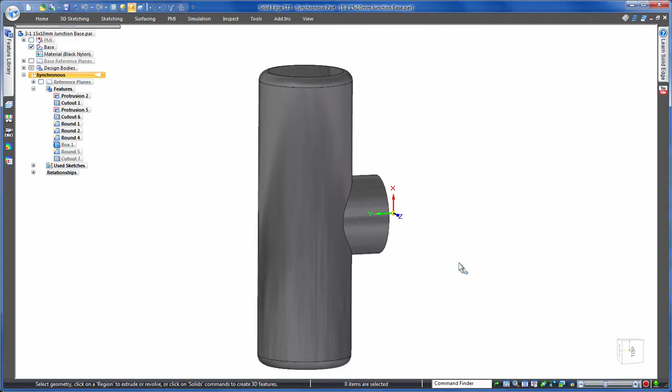Reuse and repurposing is of course the preference over recreation, whatever the subject. It saves time and effort. In CAD, this usually translates to importing data and working with the whole model. However, synchronous technology in Solid Edge also allows you to reuse individual design details.

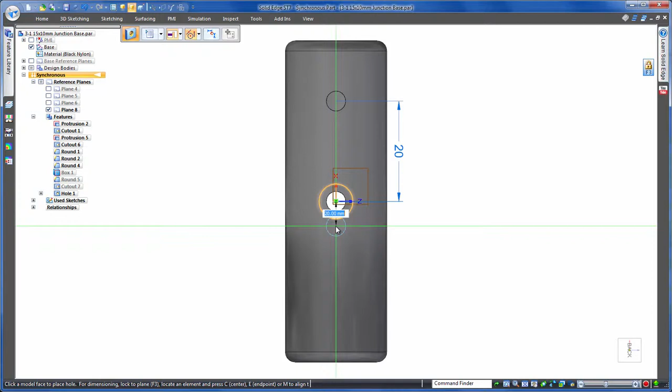In this example, we're going to create a custom fuel adapter starting with a basic body and then simply reuse design details from other Solid Edge projects to complete. First, so that we know where our output ports are going to go, we'll quickly create a few holes. And notice how quick we can space these, no separate dimensioning tool required.

Now for the barbs, and this is where we can save lots of time and effort. I know that we've created geometry like this before on another project, this blue component, so why not reuse this detail rather than waste time modelling from scratch? We simply select the detail we wish to use. The well-known Windows fence select saves a lot of time here.

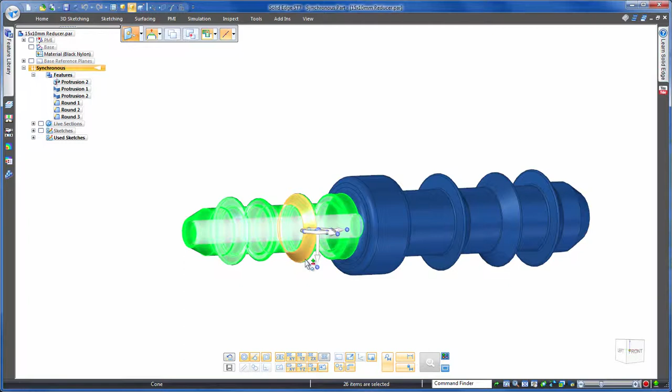Oh, and notice that we're moving what we call the steering wheel to a specific position. This is our main control for synchronous technology, and here it'll help us locate the detail in our new part. Then simply click copy, or use the Windows Ctrl+C shortcut. Back in our custom fuel adapter, we just paste it in, again using the Windows shortcut Ctrl+V if you like.

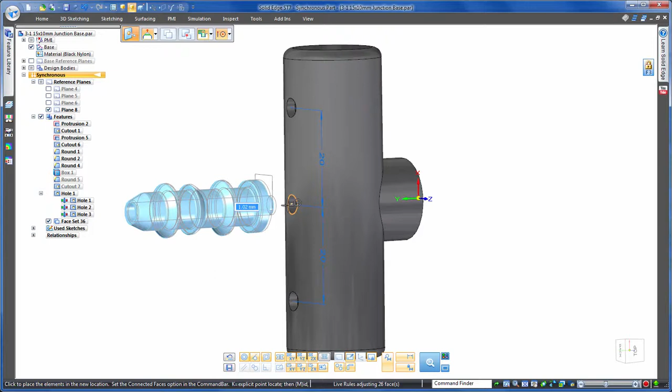And you can see our steering wheel is just where we left it, so placement becomes the simple task of snapping into place. And if you think you'll be using this detail again in the future, you can just store it away in the library. All you have to do is open your library pane and paste it into here instead. To reuse it, just drag and drop.

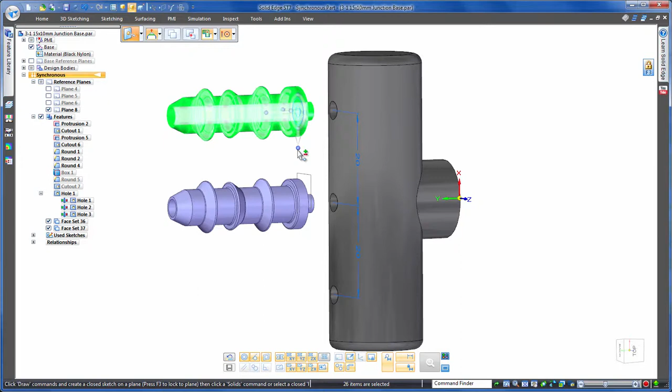The steering wheel can also be used to enter precise offset values. Here we'll offset it exactly 15mm and then snap the barb into place. Additionally, by holding down the control key while we drag the steering wheel, we can copy this barb to the other location required. Again, notice the familiar use of Windows shortcuts. Holding Control in Windows does the same thing, copies, quick and easy.

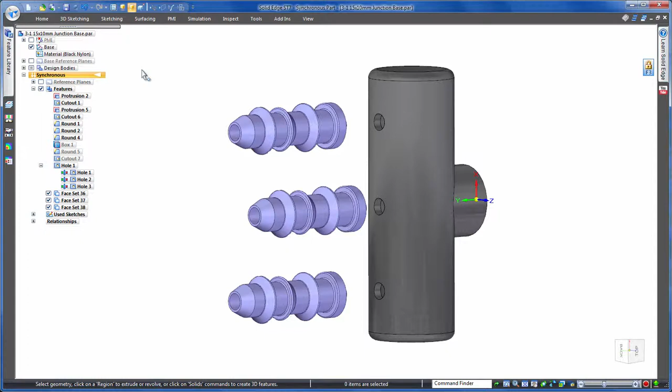Now that we have the barbs in the correct location, we need to figure out how we're going to attach the geometry to the part. Luckily there's no need to worry about such things as Boolean operations, as Solid Edge will take care of this. Watch as it automatically extends to connect to the solid geometry.

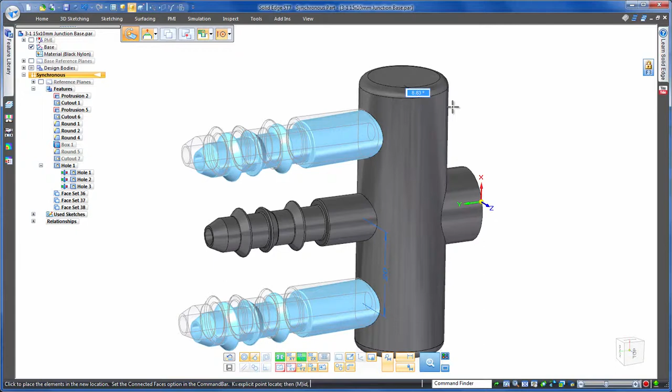But what happens if we realise after pasting these barbs that we want to move them, perhaps to help hose clearance? No problem, we can use the steering wheel at any point in time to make required mods. Let's quickly add an angled offset here to the top and bottom connectors.

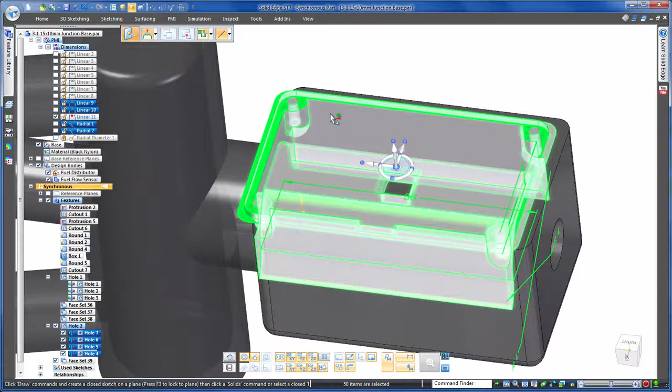Now that we have the output side of this fuel adapter finished, let's take a look at the fuel flow sensor side. Again, we have the basic geometry here. However, rather than modelling the internal sensor housing detail, let's also reuse this 3D detail from another project. The housing detail is already in our library, so all we need to do is drag and drop like before, and again use the steering wheel for placement, this time ensuring central alignment.

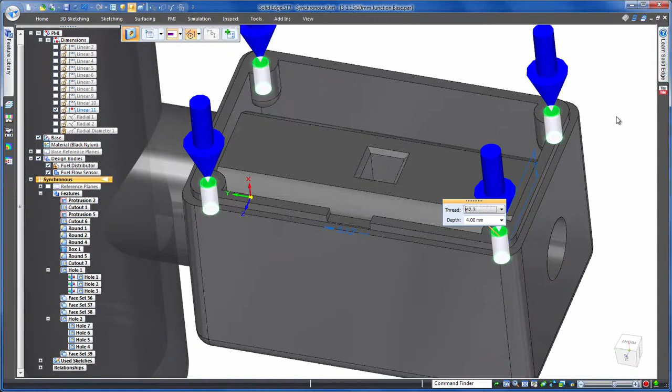Notice that when reusing 3D detail, not only can features add geometry to parts, but they can also remove geometry at the same time. Furthermore, Solid Edge will also bring through design intelligence. For example, here the holes aren't just cylindrical pieces of geometry, they're real holes, so we can accurately modify them to suit. And as for this cutout, a key dimension has come through so we know to tweak for our requirements.

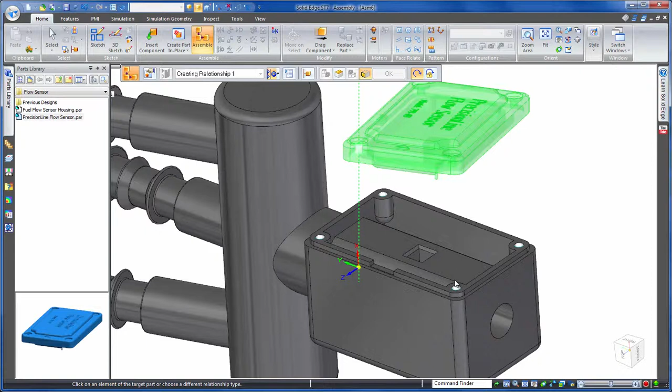Now that our custom fuel adapter is finished, let's complete the assembled unit by adding the sensor. Of course, here we're reusing a whole model rather than specific 3D detail, but still Solid Edge helps us out by reusing the assembly detail, its positioning references, to accelerate placement.

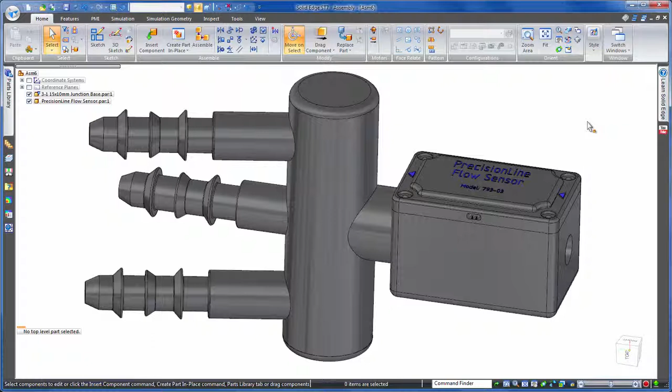In summary, we were able to precisely create our new component in just a couple of minutes, all thanks to synchronous technology in Solid Edge. It allowed us to easily reuse 3D detail from other models with just a simple copy and paste. And remember, this 3D design detail can be reused from not just Solid Edge files like we had here, but from non-Solid Edge CAD data too.